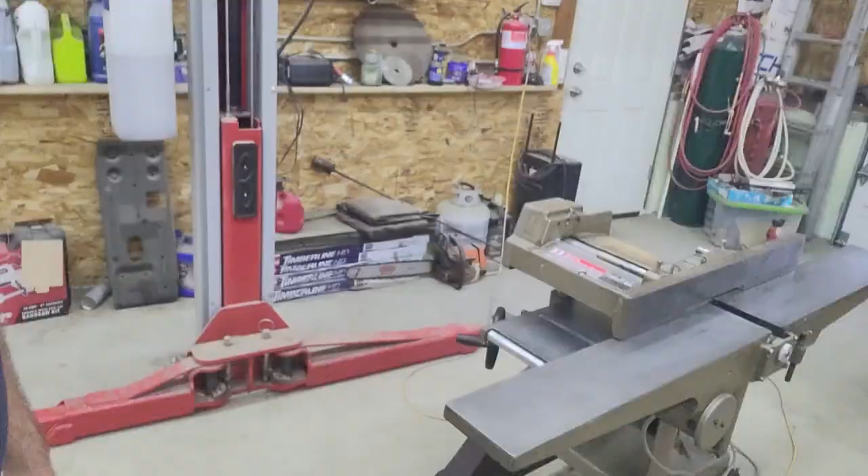So that's burned up a little bit of my time, but today we're going to get back to the hydraulic press. I'm going to work on the base, but let me take you over to show the planer real quick. It's for the most part back together. I do have to put the knives on it. They're kind of a funny height planer, not really a bench top model, but if you set them on the ground, they were very, very low.

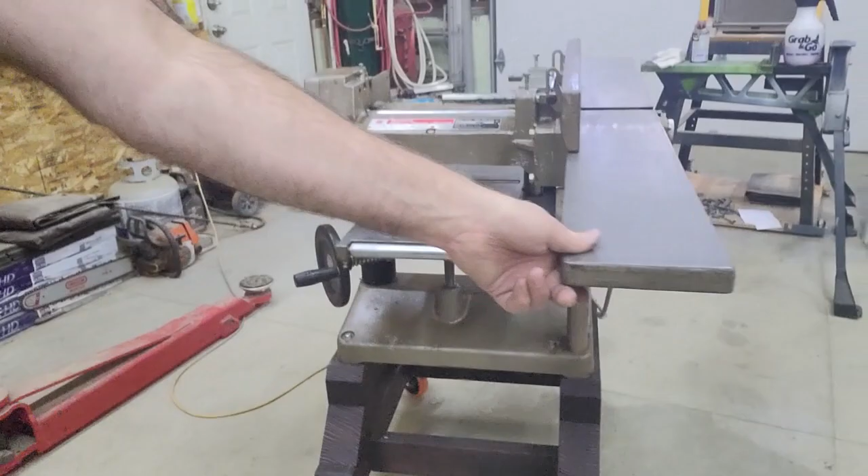So I threw together a mobile base for it. I decided to do it out of wood instead of metal, and I think that came out pretty good. It's got 4 locking casters, both the swivels and the wheels lock, so when they're locked, it's pretty stable. Other than putting the knives back on it and adjusting the knives, it's pretty much ready to go.

I got a couple more pieces of sheet metal for the dust hood that I need to clean up a little bit. But other than that, it turns on and runs.

There's guards that go over the dust collection, which doubles as a guide. Anyway, we'll get back to the press and the base I'm working on here.

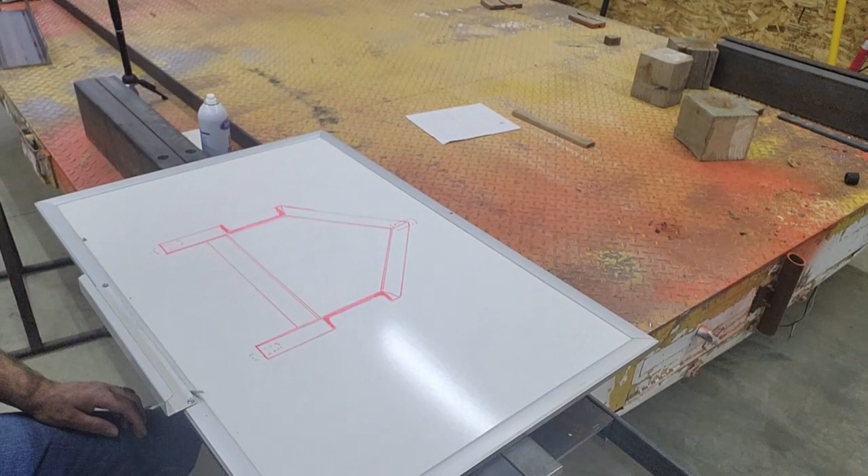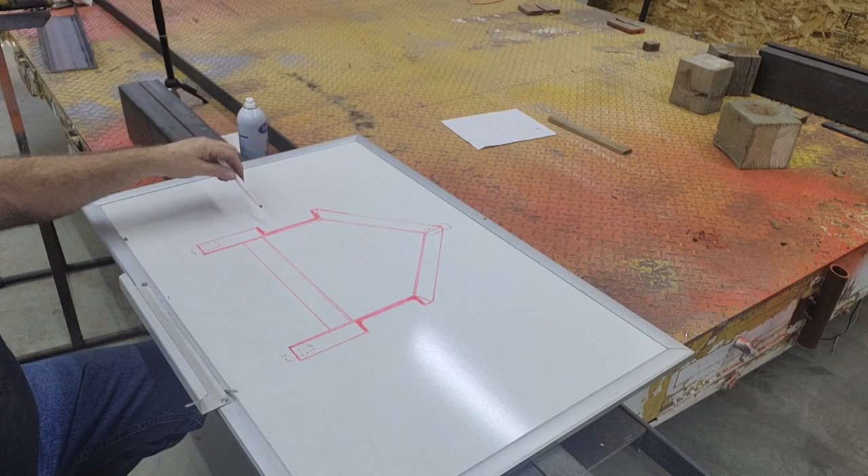I'll tilt you down, I just did a quick sketch here on the dry erase board, just to give you an idea what I'm doing. This would be a top-down view. So the shaded in areas here, that's the C channel. You can kind of see that shape closer.

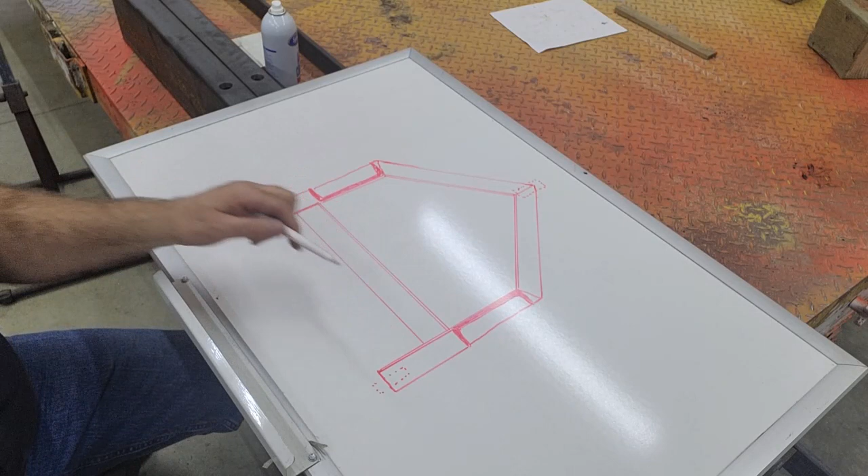I'm going to use 2-inch angle iron, so these lines should actually connect. There'll be 2-inch angle iron that the channel sets down in. This thinner line here is the leg of the channel, or the angle iron, so there'll be 2 legs. I'll cut a miter on it on both sides to come out to a center point.

And the dotted areas here will be the wheels. Probably in the case of this one, these wheels will be fixed and that one will be a swivel. The reason why I did 3 wheels, I think I mentioned it when I was talking about the design, is that 3 wheels will always sit even on the floor, not necessarily plumb or flat, but they'll always sit because 3 points make a perfect plane.

So if you have a floor that's a little bit off and you have something with 4 wheels that's really rigid, the odds of all 4 wheels touching are not that good. So this will allow it to be a little bit more stable.

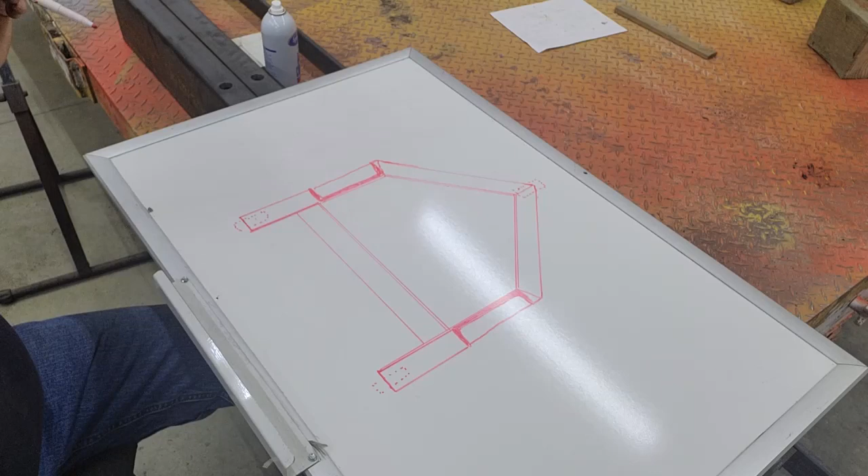And then since the back's tied together with the triangular shape, that holds it pretty stable. I didn't want to put a bar here because if you want to step in and be somewhat close, it's almost like a toe kick on a cabinet. So there'll be a small cross member here that ties them together, but that'll be set in a little bit ways.

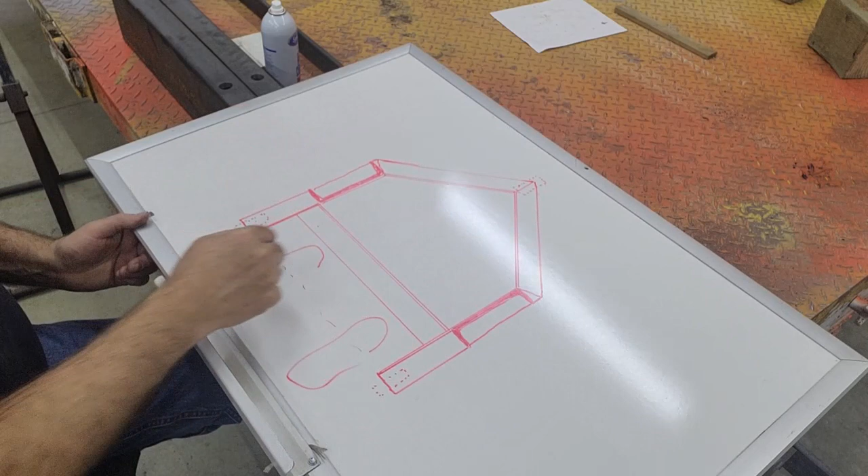So when you're standing here, envision if this was your feet, you could stand here without anything getting in the way. So anyway, that's the overall design. I did draw it up on CAD and printed that out so I know exactly what the angles are and what the cut lengths are.

So I'm going to get going cutting the steel out, and we'll get this thing glued together, and then I'll use that as one point to set the 2 upright widths the correct distance apart. And then I'll start working on the upper mount where the cylinder will go.

I got sidetracked and I didn't get the cylinder or the ram ordered until today. I know what the dimensions are, so I'll probably lay most of it out and tack a few things in place, but I won't do the final welding until the cylinder's there, which should be by the next video. So anyway, I'll set you back here and we'll get going.

What I was doing there was just getting the saw set to, it worked out to be 63.5 degrees for the first cut of that first piece.

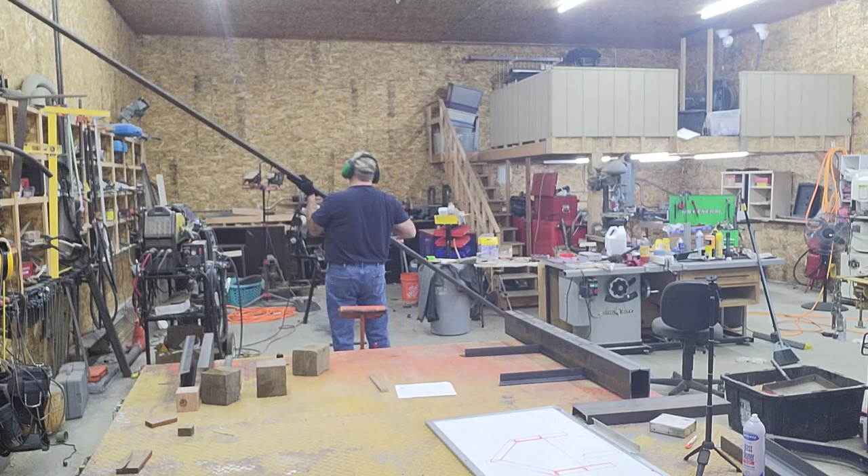What I did there was just mark an indication of which way the miter needs to go. As I mentioned, it can get pretty confusing with angle iron, so since I was going to flip the material end for end, I didn't want to lose track of that orientation, so I did a quick angled mark with the soapstone. The reason I flipped it around is that I've got two cuts at that same angle, and the next two cuts are a different angle. So instead of changing the saw twice, I leave it at that initial angle, make the cut on the opposite end, and my next two pieces will come off the opposite ends of the stick.

Well, I cut all my angles correct, at least in relation to the leg on the angle. So now, as long as the lengths were correct, it should be the right size. Let me tip you down there, so that's basically what it looks like.

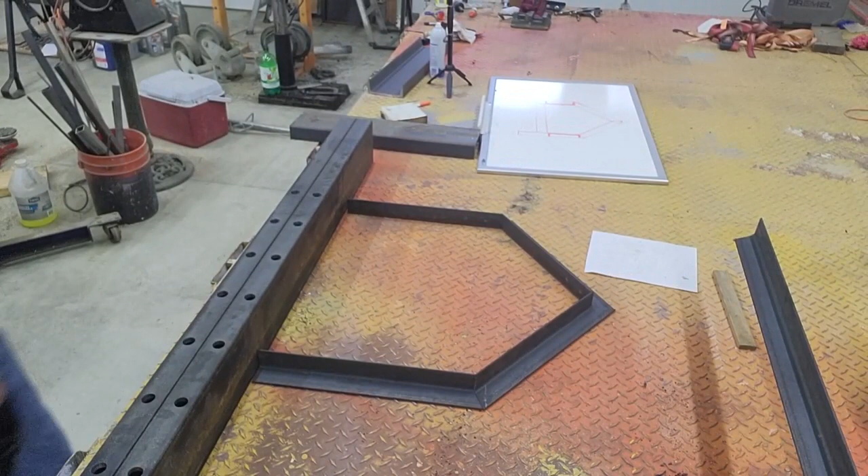The inside dimension is supposed to be 25 and 5/8, I did it right. So I'll just lay these two legs out to that dimension and see how it all fits.

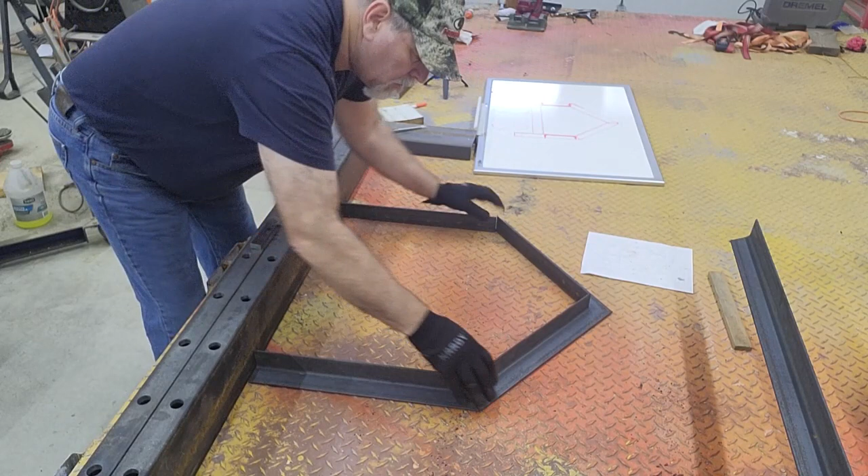Pretty close, maybe just a tick long on one of them, let me tip you down here. The gap on the peak point has opened up a tiny little bit, but certainly nothing that can't be filled with weld. So that was a success, not that it was a complicated shape or project.

I'll cut the one spreader bar, that's what's left to cut, and I'll probably just use this trailer since it's really flat. One of these days I'd love to have one of those really nice welding tables with all the dog holes in them, either a Fireball or some other brand. I've got an idea and some plans for building something similar, so maybe I'll do that on the channel at some point. But for now, this trailer is pretty darn flat, so I'll get that last piece cut, and then lay it out and bring you right back.

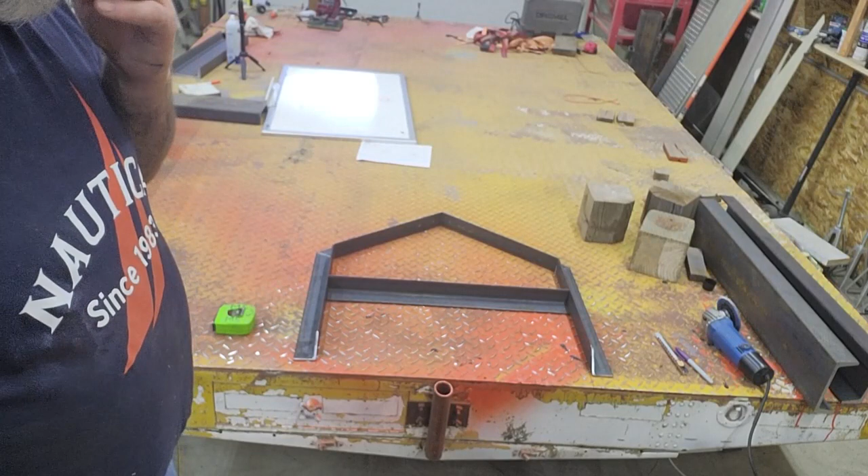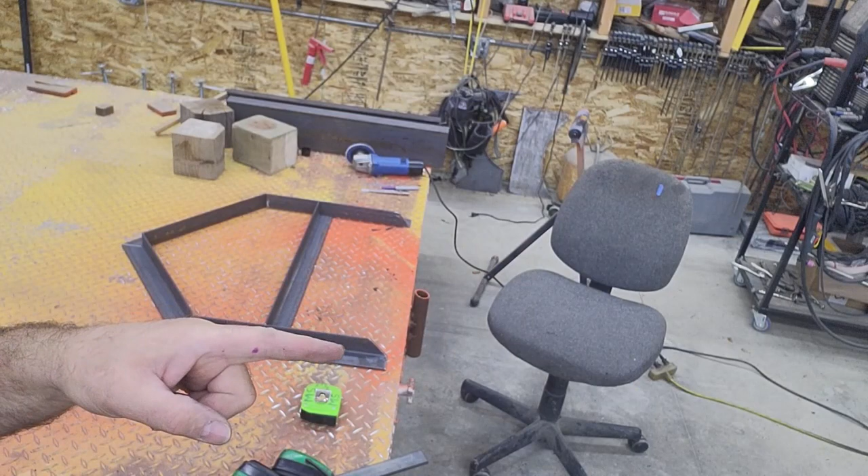Okay, let me tip you down here. I got that last piece cut, it was just straight with square cut corners, so nothing too interesting there, which is why I did that off camera. I also knocked off all the sharp edges and burrs. The last thing I did, not that it was critical, but it makes it look a little nicer - if you'd ever lean over and look, I knocked off these corners and put a 45 on them, so there's not a sharp edge there, plus it makes it look a little nicer.

So, another advantage of using the trailer - a couple things nice about it. One, because it's diamond plate, any little shavings or things fall down below the diamond, so the highest points of the diamonds are what your material sets on. Sorry, the tripod was leaning there. That's a little bit better than just sitting on a flat piece of steel.

Also, the diamonds kind of act as if you had graph paper. It lets you square things up easily by lining up the diamonds, because the diamond plates on this trailer are in a width-wise configuration, 8 foot wide by 4 foot deep. And then lastly, it's an all-aluminum trailer. The diamond plate's aluminum, the frame's aluminum, so when you're welding, none of the spatter sticks to it.

Anyway, as you can see, I've got it laid out here, squared up with the diamonds. I double checked my measurements, so I'll get the welder over here. I'll tack these up, since there's really no easy way to clamp them down. This is a base for that, doesn't have to be perfect. Since there's 3 points, I'm going to carefully tack a little bit at each of the joints before I get carried away welding it, to cut down on how much the metal pulls when I do the final weld. So we'll get going on that.

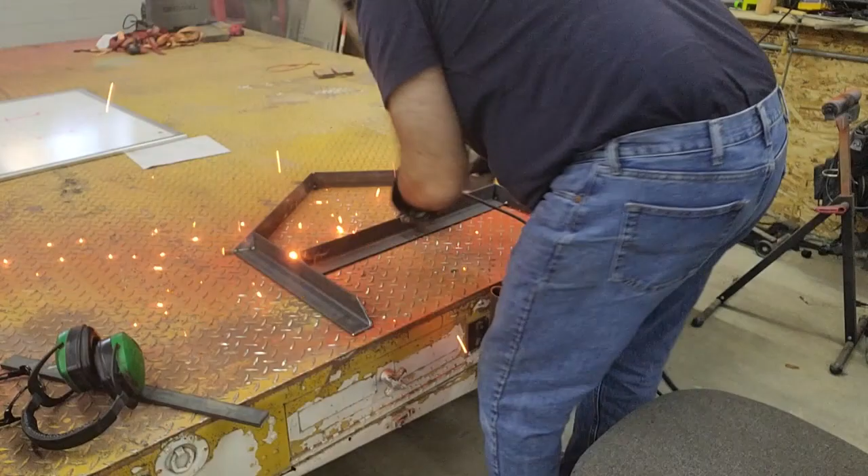Basically what I did there is I just welded every intersection of all 4 portions, the 4 points on the legs of the angle. So that should hold it well enough for what this is going to be. I'll finish getting it welded out, and in this case I probably won't need to worry about grinding the welds down. The only place I'll grind the welds down is on that forward point, because there'll be a wheel or caster bolted to that. I'll grind that flat. Other than that, I'll just leave the welds the way they are.

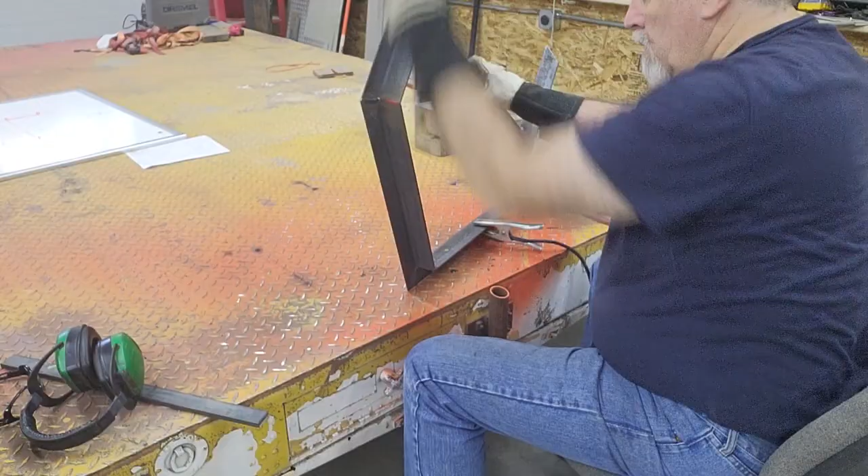Alright, so that didn't take long to weld out. I didn't even bother to run a bead on this very front one, just to grind it all back down. It was pretty good - I could see through there was a little bit of a gap, but it penetrated just fine.

So that makes up the base for the press. The upright channels will fit in this front section, here in between that first miter and that cross member. So like I said, you can put your feet in this area when standing in front. I've got a few other chores to get to, so I'm going to stop this one here. There's probably not enough content for one episode, so I imagine I'll be right back shortly with some other work.

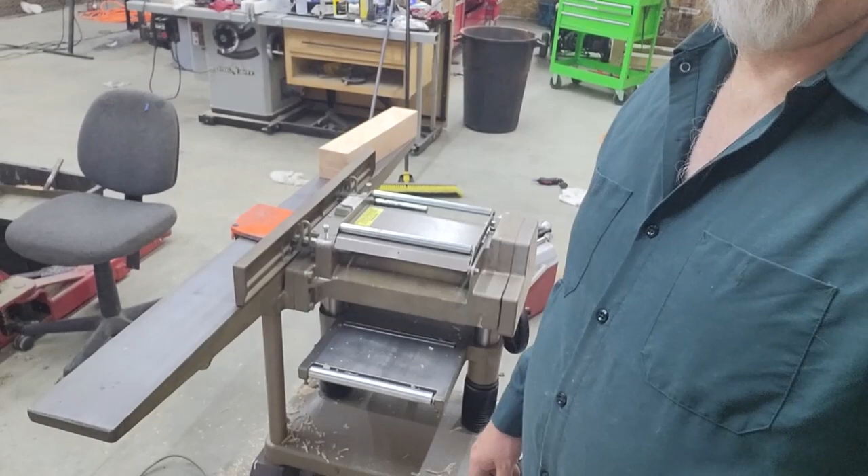Get your tip down here so you can get a little better angle. It's on a common shaft with one motor that runs both the planer and the jointer. On the jointer you're using the top of the cutter on top of the table, and on the planer, the underside - you actually feed from opposite ends depending on which operation you're doing.

I've just got a scrap 4x4 here.

So that's that. I'm guessing the rubber urethane, the liquid urethane I used on the rollers, must have been about the right durometer, because it seems to grip that wood and feed it through just fine. So let's get back over to the press.

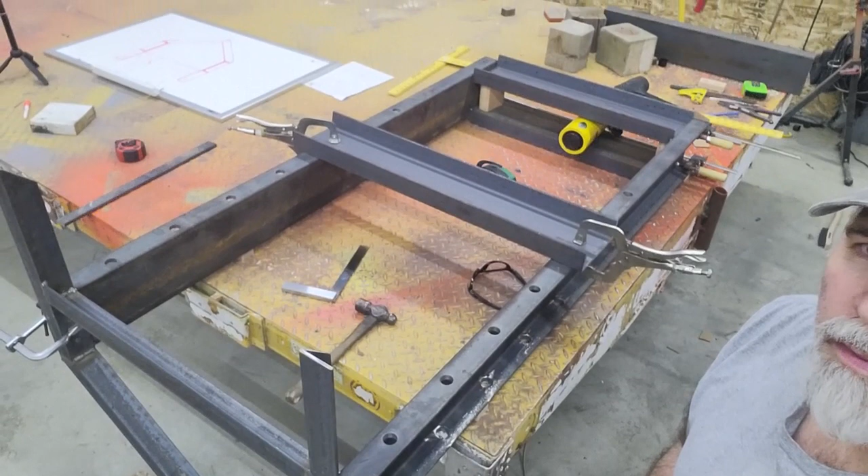Okay, so I did do a little bit of setup off camera, as you guys having to watch me measure and remeasure and check for square and plumb and tap pieces around is probably pretty boring. So my setup was just getting it set down on the table - you can see here on the left - and getting things square, plumb, parallel, all those different dimensions you measure.

What I did is, you probably can't tell from here, but it's sitting up on blocks about 7/8 of an inch, 4 blocks, and the reason is the 2 cross pieces up here at the top that hold the ram need room for the ram in between them. That resulted in them being farther apart than the total 6 inches of the channel here, so they stick up about, I think, 3/4 of an inch. Yeah, right at 3/4 of an inch.

So what I did, so that the one cross member could sit flat on the trailer, I just raised the main frames up, like I said, about 7/8 of an inch. That allowed for room for the ram plus a little bit of space in there. So that's what I did on that end.

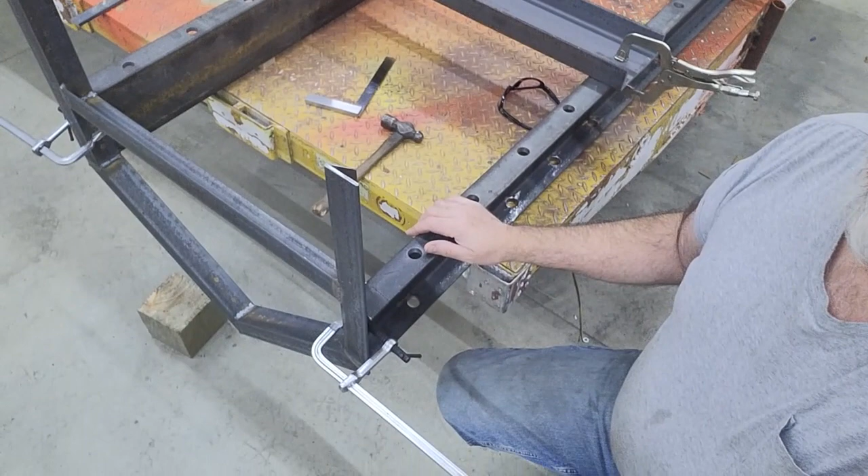This table piece is just clamped on there to help stabilize things a little bit. The top 2 pieces are clamped in place. The base down here is also just clamped in place, plumbed and squared.

So it's pretty much everything's exactly where it needs to be, as far as parallel, square, etc.

So what I'm going to do, a shape like this that has lots of different intersecting joints welds out pretty good, because I'll go along and tack pretty much all those little places where there's an intersection between one piece and the other before I start doing any major welding.

That way it really locks the whole weldment into a structurally sound position, so that when I do start doing longer weld beads, it won't pull out of shape.

So I'll get going here on that, get this thing welded up. We'll tip it up on its stand, and then you'll get a rough idea what it looks like.

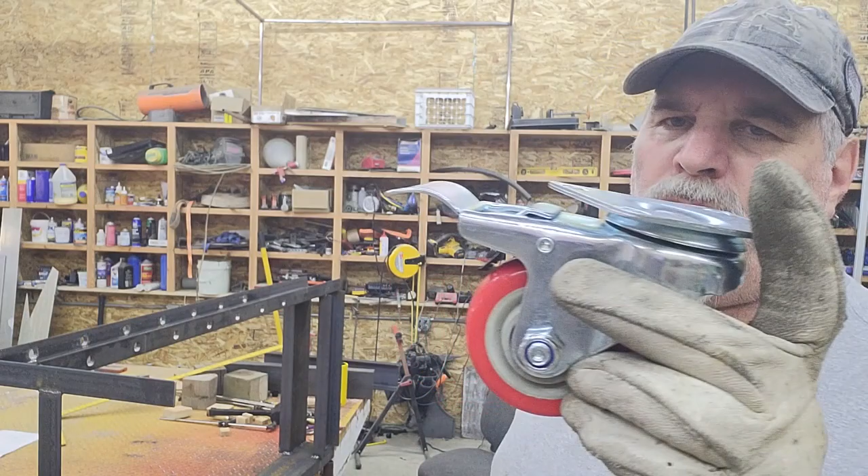As I mentioned, I'll have 2 of them here, these fixed style. I think these are rated at 600 pounds each, so they'll be more than sufficient. And then one swivel double-locking - it locks the wheel and locks the swivel. That will go on that 3rd spot.

They are set up with bolt holes in them, but the bolt hole pattern, you may be able to see there, is about the same width as the angle, so I'd have to drill new bolt hole patterns.

So I'm a fan of, if I don't think I'll ever have to take it off again, which I probably won't, I'm a fan of just tacking stuff on.

I'm not going to weld them fully on. I'll just probably run a 1-inch bead or so on each end, on this end and this end. So if I do ever have to take them off, it's easy enough to cut the weld loose.

Alrighty, let's see if I can stand this up without something bad happening. Scooch you back here, because it's not exactly light.

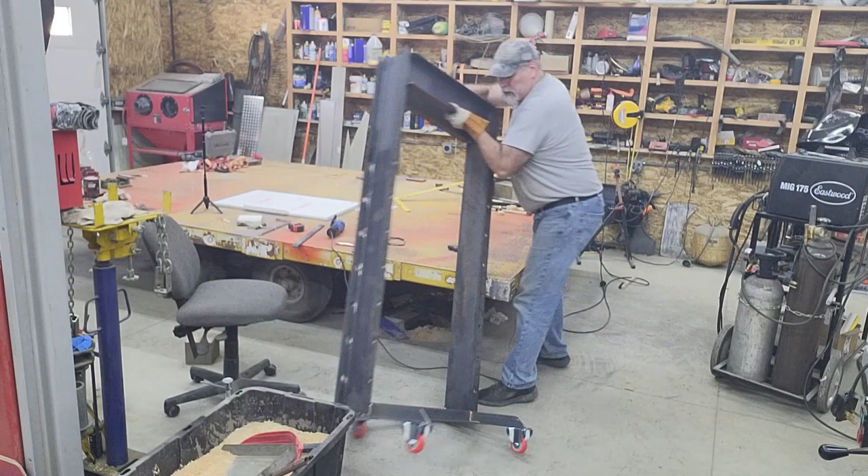I think that'll work.

Yeah, I like the way that turned out.